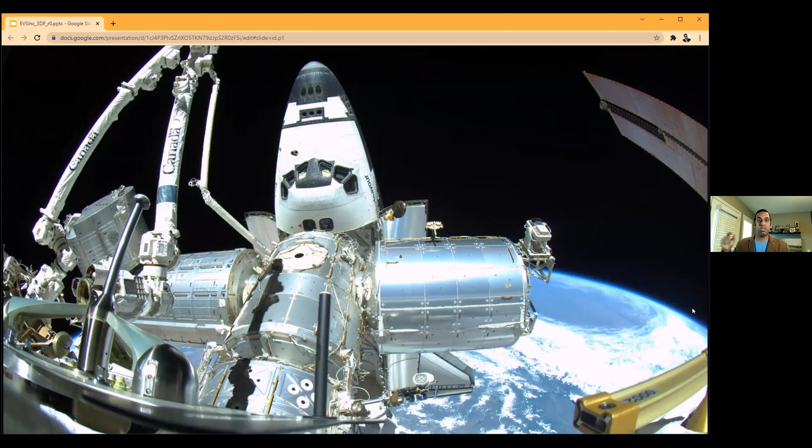Of course, the biggest piece of all of this is what's behind the space station and the space shuttle, and that's our Earth and the black abyss of space and what is to come. There's so much more that we don't know and want to explore as a collective humanity. It gives you that perspective of where we're heading, and technologies like additive manufacturing will absolutely make things not only affordable but also feasible to get us to that next jumping-off point.

So what we're going to talk about today, I'll keep it very high level and generic, and of course we can get into details through some line of questioning. We'll talk about additive manufacturing and 3D printing, two terms I'll use a lot, often shortened to AM and 3DP. Are they the same? Are they different? What does it mean?

We'll talk a bit about the types of additive manufacturing, as well as the materials that are used or could be used. We'll cover first principles, taking you through my own production journey—I've 3D printed some things at home, but the principles you apply to printing at a home-based DIY printer are very similar to what you'd use at the industrial scale of AM.

We'll look at the applications of this technology and how it's disrupting some markets. We'll take a look at the market in terms of some of the market leaders, where it has come from and grown, and how you're able to get engaged. And then we'll take any questions that you may have.

Coming from the mechanical engineering background and technical background that I have, I thought I'd throw out the most technical thing you're going to see in today's discussion, and that starts with the definitions. This comes from the ASTM International Committee on Additive Manufacturing, essentially a technical working group comprised of experts internationally that provide insight into the progress, but also standards, of manufacturing.

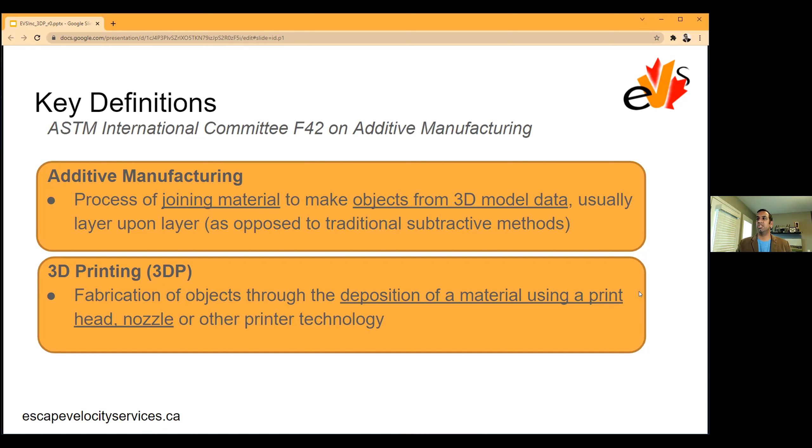So I took an interesting approach to this. I noted some notable milestones from my own experience with 3D printing, and I'll have a slide later on about the general history of the sector.

In 1997, NASA actually published a paper on 3D printing and the technology. If you're not familiar, NASA, the space agency in the States, produces what's called the spin-off report every year, talking about technologies being researched, developed and used based on contributions from taxpayers investing back into the community. That's one reason why investment in the space sector is such an important contribution - technologies like 3D printing and their advancements are then returned back into society.

NASA has been a leader in a number of different areas, and by no means did they create the 3D printing technology, but they've had the opportunity to understand how it can be used in production of very complex, high-end, robust parts and products for, in this case, the aerospace sector.

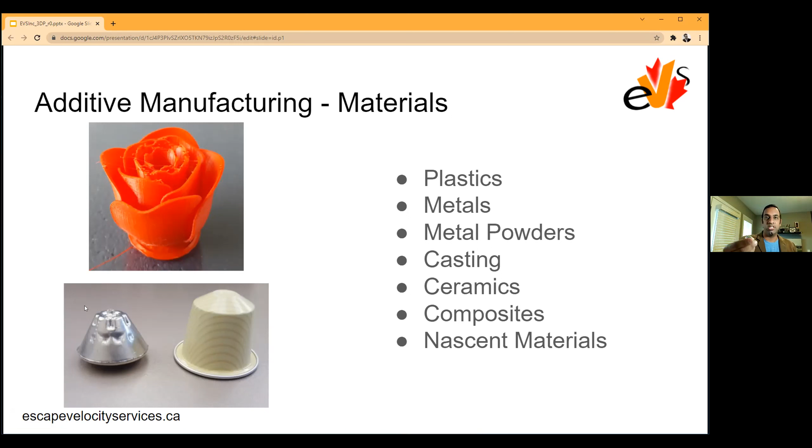So I talked about materials. What about types? There are a number of different types of manufacturing processes used in the additive manufacturing space. The four I've bolded here are the primary, leading approaches. The others are used, but they're very specific or not as common.

So the four I'll touch on today are: first, material extrusion. As I mentioned, I made this flower—that's actually the start of the production process on the Ultimaker 2. That's called material extrusion. Essentially, you're feeding in raw material, whether it's a roll of feedstock, or it comes as balls or powder, depending. In this case, it's a string of plastic PLA material that runs through the printer head and gets melted at a particular point so that it's deposited.

That's material extrusion—it dries layer by layer as the elevated platform moves up and down. Depending on the type of printer you have, the tolerances, how much you're willing to spend, and a bunch of other things, the amount that layer moves can vary—it could be down to thousandths of an inch if you need it for certain applications.

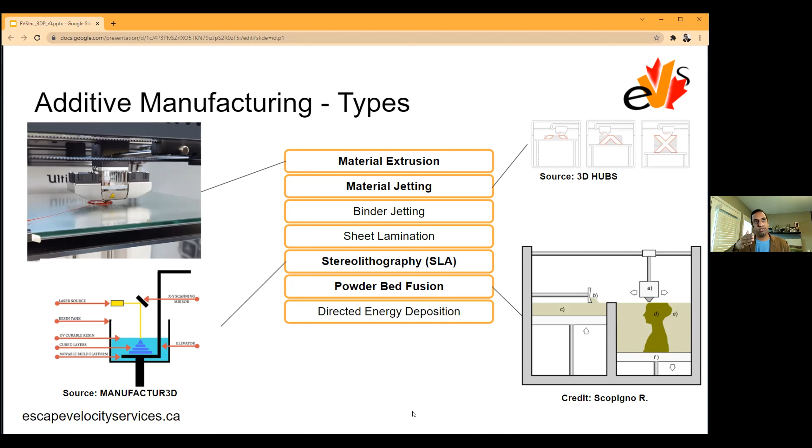This goes back to the design process of product design. You start with what your needs are for your product, and then select the type. There are companies out there that offer expertise in each one of these, or all of them, which then drives your procurement process.

So I said I'd talk about first principles. I'll take an example of something I printed with the Ultimaker 2, and walk you through the various stages. If you have expertise in product design or 3D printing, you've probably heard this before, but for those new to it, it's a really good methodology to follow if you're not sure where to start - first principles of design.

When you're 3D printing a product, you start with a file. The printer itself just follows a set of code that says: go here, deposit this much; go there, deposit this much. That's all it does, but it's doing that based on a file you provided.

That's typically what's called an STL file. If you look here, I've loaded a file into the printer, and the printer software shows me where I want to print, where I can put these particular pieces. It represents how long it'll take, how much material I'll use, and the size it'll be. I can shrink it or make it bigger while it's in the printer.

But even before I get to this point, I wanted to figure out what I was trying to do. In this case, I wanted essentially a coaster - something kind of spacey, that'd be cool.

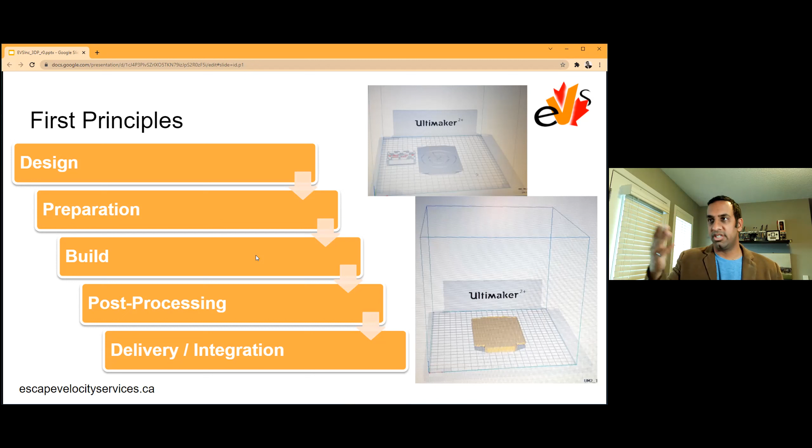So build time takes its time, then there's post-processing, but we'll stick to the build. Here you can see I started printing the barge for SpaceX. What the printer did in this case was layer down temporary plastic — all this stuff around the edges was not actually part of the product. The printer did that to ensure it had a print area to stay within and the ability to know where to find certain things.

This was the rose that I 3D printed. If you've never seen a printer in action, this is what it is — it's layering the plastic one ring at a time. As you can see, it's very, very thin. This plate is moving at a very slow rate, but it's all programmed into that STL file to tell the printer the certain thickness needed, and it must move the plate at a certain frequency to ensure the layers being deposited are of a certain thickness.

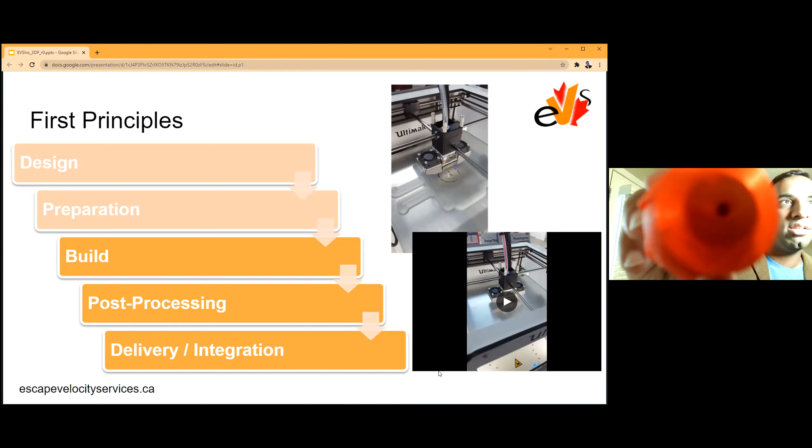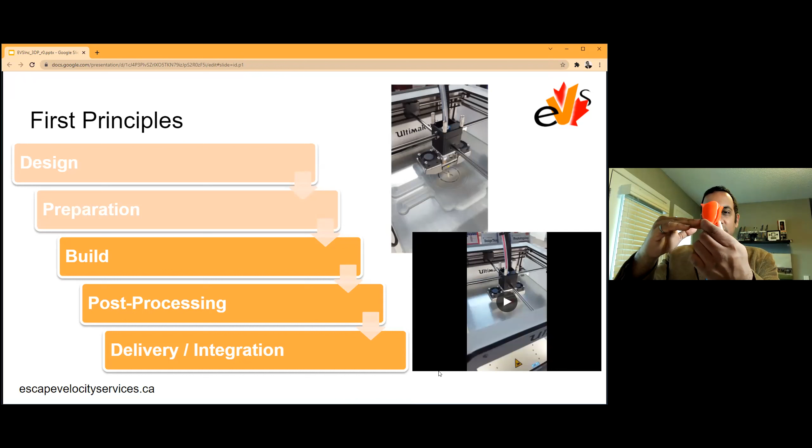You can see how I was doing it. If you look, that's making the base, and I'll show you the base of the actual product. My focus isn't there, but you can kind of see there are rings, a bit translucent in the middle base. So it started forming that, and the printer head went up — sorry, the glass plate went down so that the printer head could build up.

Now post-processing. Everybody thinks, oh, I press print, it comes out of the printer, it's ready to go, I can go on my way. You can't. A lot of people forget that 3D printing is a means to an end. Just like any other manufacturing process, there are things you have to do to ensure the product is prepared into its final state. That's called post-processing. Especially if you've ever done 3D printing at home, you'll realize this.

As I mentioned, the printer printed out this extra layer around the actual product that I wanted. I have to be able to break those off so I can get the piece that I need. Same kind of thing here. Likewise, on the barge itself, you can see here, I didn't have any supports underneath the cantilevers there, so it didn't print correctly, and that's okay. But I could still use this part.

So what I had to do is take some sandpaper, some very fine sandpaper, and sand it down to get rid of all the wispies and extra material I didn't need. And then on the bottom, if you look closely at this one, you can see how the printer actually layered the material on. It's very intriguing. I had to sand a bit on the base to ensure it stayed flat. Don't want my coffee spilling over, right?

And then of course, the last piece is delivery integration. Once you've done the post-processing—and these techniques are the same ones you'd use on an industrial scale as at home—delivery integration means your product and piece is ready to go. They pop your piece in the mail, and then it's received by your supplier or within part of your supply chain. You enter it into your manufacturing process, add it into your overall product, and test.

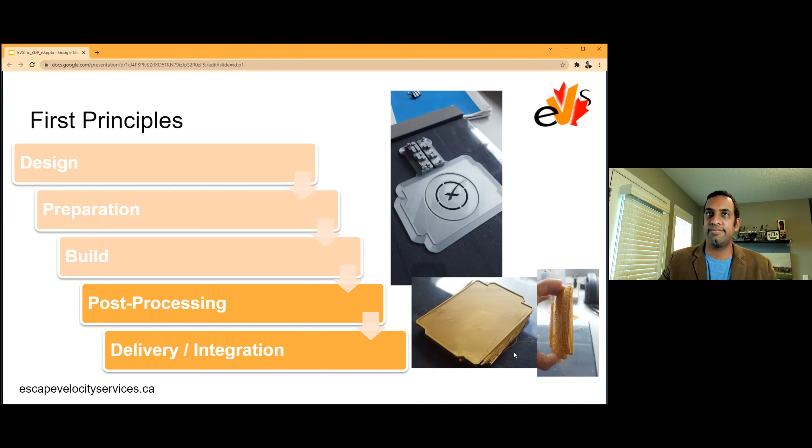So that's a bit about the production and things to consider when you are choosing to use additive manufacturing as an approach. Now, what are some of the benefits?

It's cost effective by volume. As I mentioned earlier, it's very much affordable to do these types of things because you can have a scale of productivity that you didn't have earlier when it came to more expensive and higher tolerance production capabilities. Again, with CNC machining you can get really, really good accuracy. With 3D printing you can as well—it's built itself up over the years. But in some cases where you need very tight tolerances, sometimes additive manufacturing doesn't get it for you.

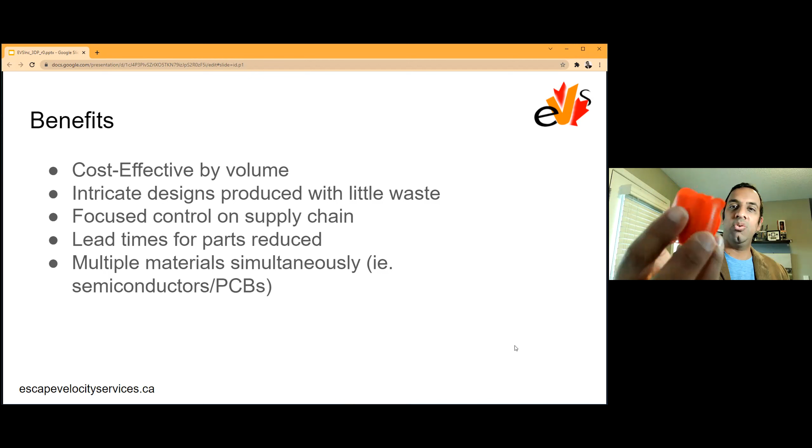But again, it depends on what the application of your product is going to be. Intricate designs—traditionally, a lot of other methods are manual related. You've got a mill or a lathe, and someone operating that, or a set of code, but it's very challenging to make very intricate designs. With 3D printing, to produce something this complex by traditional means of manufacturing would be very time consuming and costly. But look at how complex this actually is on the inside—additive manufacturing didn't think twice. It was very straightforward, with little waste as well. You're only using as much as you need.

You can focus control on your supply chain. There are a lot of vertically integrated companies out there engaging 3D printing as part of their supply chain, embedded in their home facilities to add to that. So they have control of it rather than depending on external sources and external procurement.

Lead times for parts are reduced—if I wanted to create one of these with traditional methods, it would take quite a long time. And if I needed to send out 50 for Valentine's Day and I'm two days out, it's not going to be done. So you can do a lot more quickly with additive manufacturing. And what I haven't shown here, because it's a bit more costly and the machines and tools I was using didn't lend themselves to it—you can actually use multiple materials simultaneously in 3D printing, whereas traditional modes of manufacturing require casting a part and then adding a ceramic layer with a spray or specific paint.

You can do all those types of things in one shot with additive manufacturing. So one example I like to use that I saw at the Rapid conference in 2016 was the world's first 3D printed semiconductor. For those of you in the electrical world, the fact that you can print a semiconductor in its entirety in one go, that is incredible.

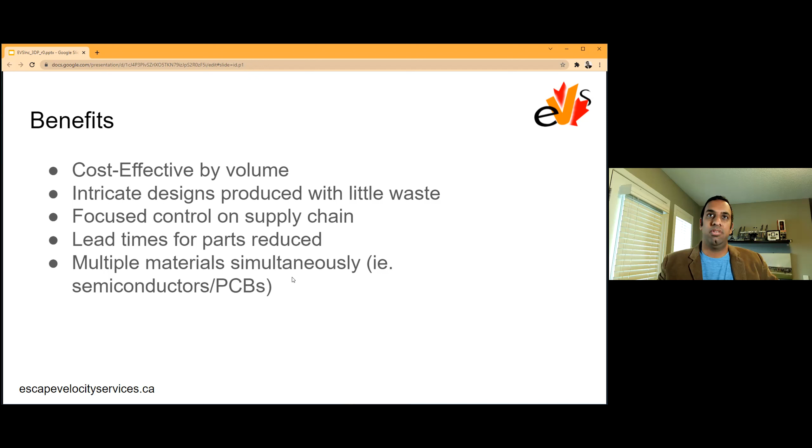Some challenges, of course, it's not all rosy, because with everything there's always some challenges to worry about. The purity of material properties - for those of you that come from the material property world or are interested in material selection, 3D printing is wonderful. But again, it depends on you choosing the right material for your application or product.

The strength of materials, of course - you've got a great metal produced product here, excellent. But depending on your application, if you need extreme purity of your material, you basically have to print in a vacuum. There are certain powders, when that metallic powder is then cured, if you induce air into that curation process, you're going to have gaps and deformities within the material property of that metal. So what does that mean? That means you actually lose, in some cases, some strength or capability of the material you are intending to use, because it has built-in cavities down to the molecular level of how the material is cured.

So in some cases, if you need high performance parts that don't have those kinds of issues, you have to essentially print in a vacuum-based environment where you're not inducing external influences, and the material can cure evenly and consistently as needed in order to produce your part. So things to think about.

Supported designs, which I mentioned with my example part there - supporting those designs, how you place and produce the part. If you're working on an industrial scale with some partners, they'll be able to walk you through that. But you also have to understand that there are going to be times when you might have a little bit of waste, because you have to support your design to get the end product you're looking for.

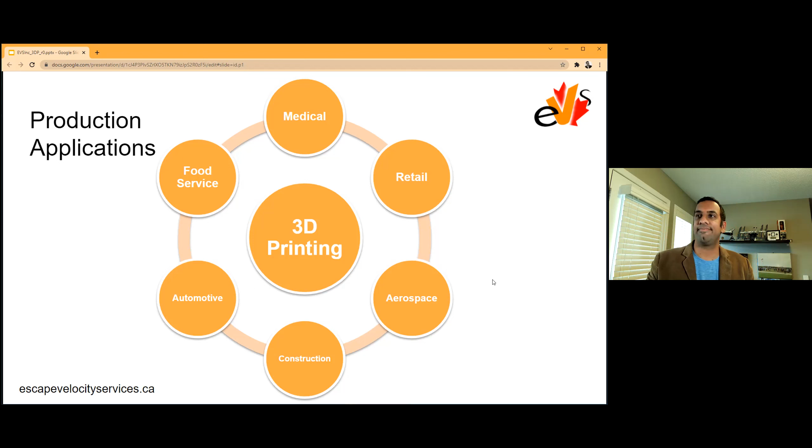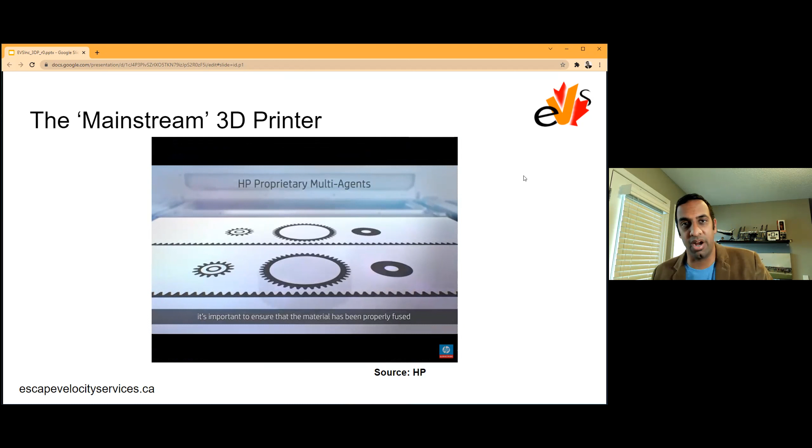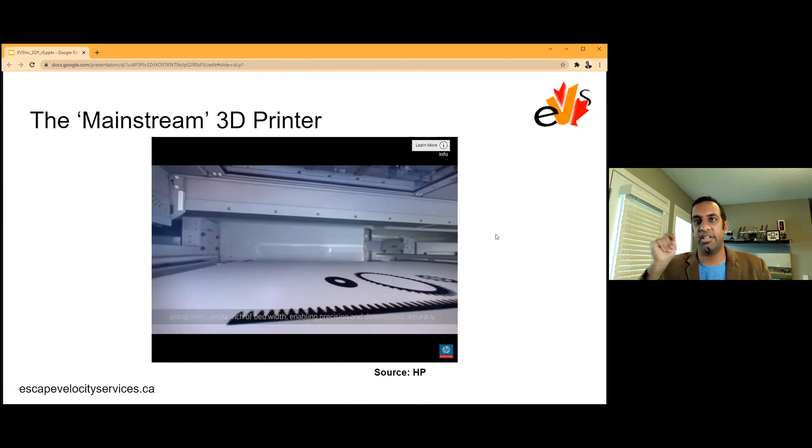I mentioned that HP is the mainstream 3D printer. This is their patented technology, called MJF, multi-jet fusion. So what it does is that approach - it's their proprietary technology. If you look closely, I'll replay it so you can see it: it's depositing just like an inkjet printer, but it's also got a curable light. So as they're depositing, they're curing. As they're depositing, they're curing. That's making the manufacturing process extremely quick.

This is used for certain applications. What they don't show you here is that this is one unit of three - of course, everybody wants to sell more things. This unit, if I remember correctly, was probably about 250 to 300,000. But it has the ability that you could put it in your office, just like your normal plotters or normal paper printers. HP is trying to bring that into the mainstream.

They actually have two other units very similar to this that support post-processing. Remember, you can't just take the piece out of here - you have to do some work on it before it's production ready or use ready. You can see on the right side, they use the resin or powder to make it - those are the cartridges that swap in and out. If you buy the whole system and run it, you're probably looking at $700-800,000, under $1 million at the time. That was a few years ago, but things have moved on since then.

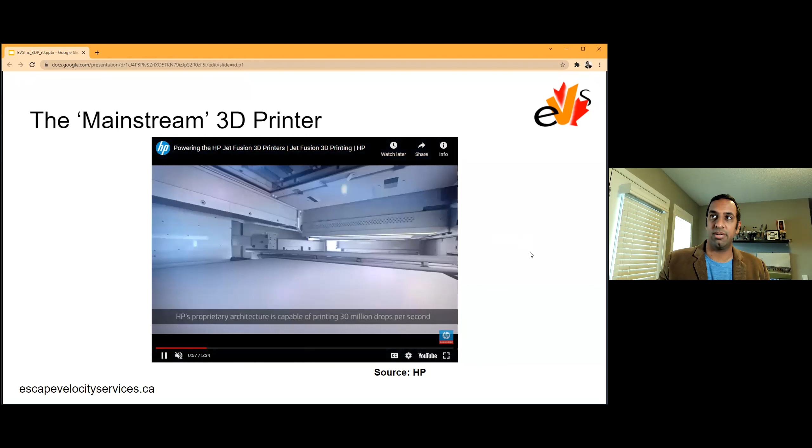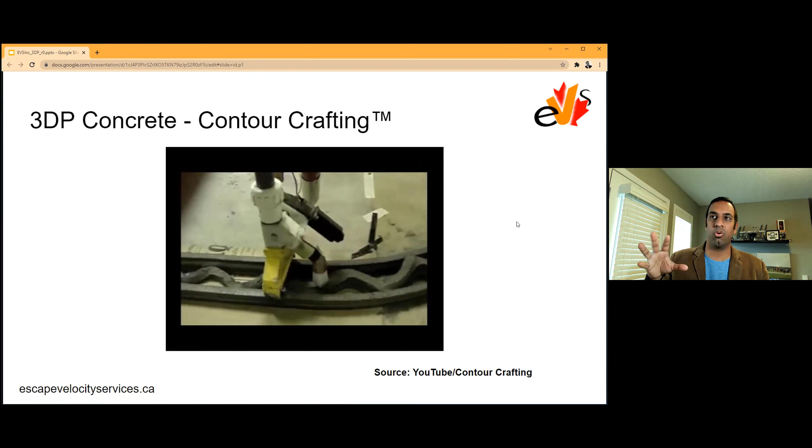But again, we've got some great examples here. I mentioned construction - 3D printing concrete, or what's trademarked as contour crafting. There was a professor from the University of Southern California who has been working on this for decades, owns a patent, and has now spun out a company that does it. What they do is essentially 3D print concrete. All the labor that has traditionally gone into concrete laying, concrete pouring, is removed with this process. So the amount of costs related to that, the production time you could save, the tolerance you could get, and the really rapid production you could build.

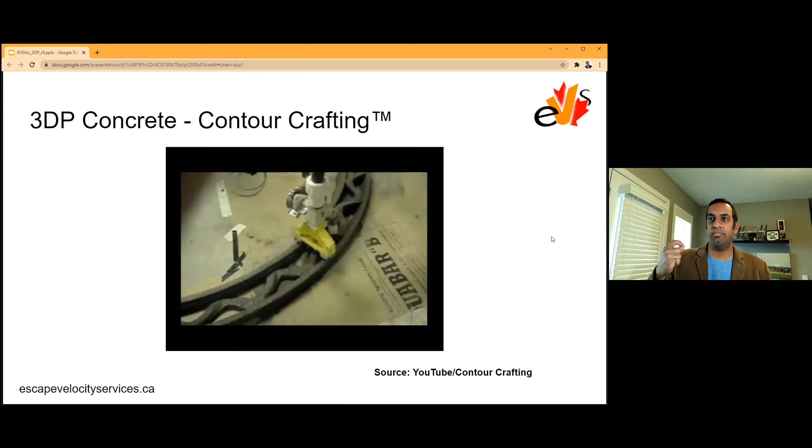There are companies in China as well as North America and Europe that are honing this technique to be able to build structures within a day. Let that sink in. If you could build a structure in a day, especially in areas that are hard to reach or deprived, impoverished areas that could really use quality housing - this is revolutionary, right? So this is another really good example of disruption in construction.

I mentioned Relativity Space at the top, 3D printing an entire rocket. This is their system that they developed and built and honed over the years - founded in 2015, and this is very 2020. There you go - literally and entirely, the engine, nozzle, the body of the rocket. What you see here is the tanks that hold the liquid oxygen and methane used by the rocket. So they're developing their own rocket, not producing these for others - they're building it as part of their own production process. That's an opportunity - it's called the Terran, if you're interested in following up on that.

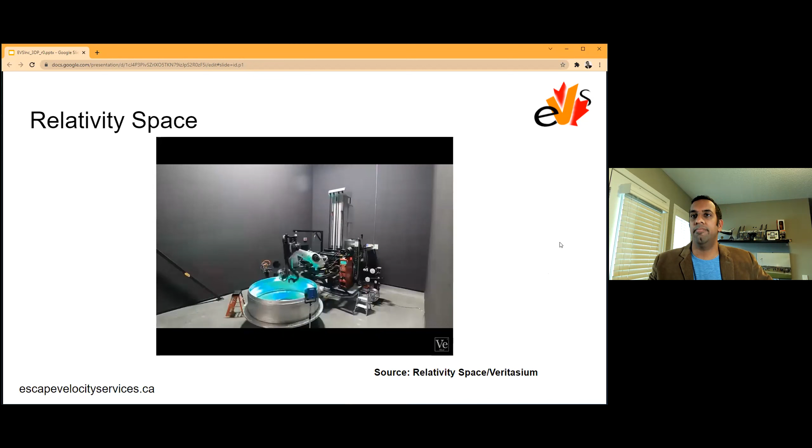This is the capability and flexibility that additive manufacturing and 3D printing allows you the opportunity to do. To do this even 5 years ago without 3D printing would be 10 times costlier, and it would take a lot longer to do. So there are advantages that I mentioned off the top.

I wanted to touch a bit more on the market and engagement. As I mentioned, 3D printing as an idea has been around since the 60s, but really didn't mature into conception until about the 1980s, where people started producing patents and companies were founded - for example, 3D Systems. They started saying, okay, let's build the hardware to go with the idea. And like any good product and good idea, a lot of research and development went in.

They started focusing on, okay, well it's very expensive for one-off offshoots, so let's try and look at prototyping and how we can support that industry. And then starting to get into iterative design - how do we make products better? How do you support design of products? And then, of course, like anything else, in the 1980s we didn't have these capabilities yet.

That's technology growing at the pace it does, doubling every 2 years. The growth and adoption stage hit in the 2000s. Raw materials were more available, we had more accessible and affordable technology, generative design, and started implementing some smarts and intuition into the design process. Those all started occurring around the same time, and that's, in my mind, when the market in terms of additive manufacturing started to really be taken on seriously.

In supply chains. And then, of course, with the classic innovation and adoption curve, there's the early adopters, there's those that hit it at the mark, and then there's the laggards. And so the DIY movement was created - we took the traditional technologies of 3D printing, which were very expensive, miniaturized them, and put them in your homes.